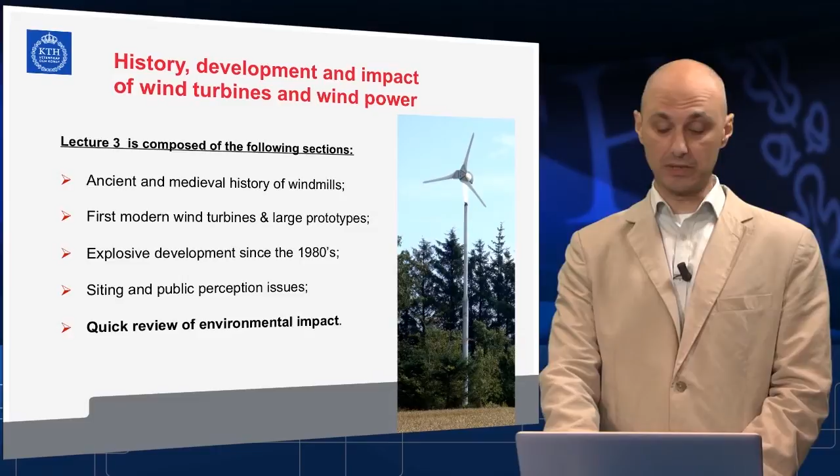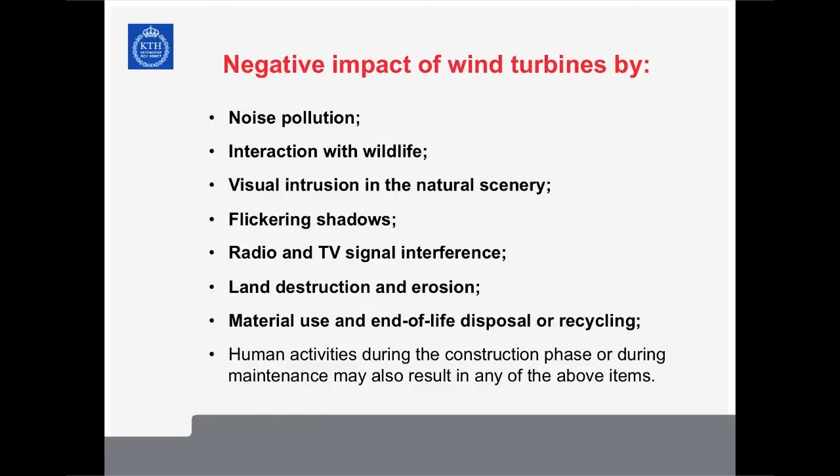What is the impact of wind turbines? Definitely there is always an impact. First of all, they sit where they are visible to everybody, because they should be sitting in the open wind. There is noise. There is interaction with all kinds of life around, both wildlife and human-made life. There is visual intrusion, yes. There are flickering shadows, not always, but sometimes this can be very irritating. Some kind of interference with radio communication systems also.

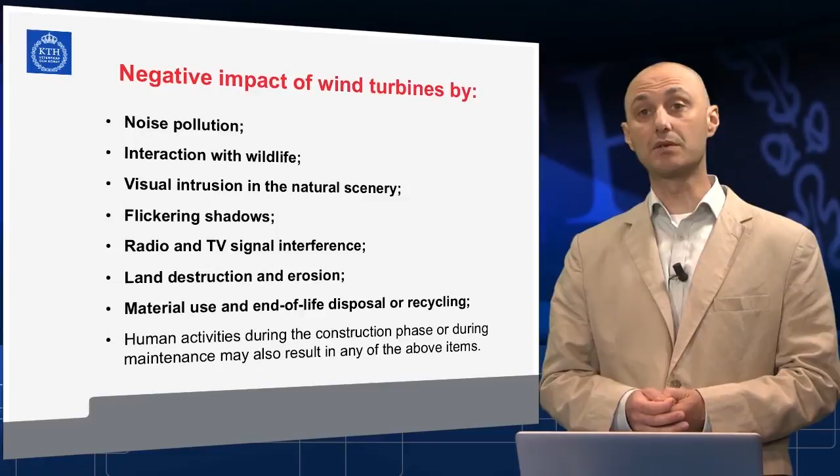And to all these direct effects, we can also add indirect impact through land destruction, erosion, human activities related to wind farm construction, maintenance, and so on. Material involved in wind turbine construction. These can actually be serious issues and will grow in importance more and more in the future. Let's look quickly at all of these major topics.

Noise, definitely underestimated. Wind turbines are noisy, as any machine is, and we can divide the noise into two major sources. Mechanical, from the machinery inside the turbine, and aerodynamic, from the blades, or the interaction between blades and the wind flow, the fluid. The mechanical noise is the typical whining noise of any kind of machine, like gearboxes, cogwheels, generators, shafts, etc., inside. Also, other small devices emit noise, sometimes cooling fans in the electronic devices, any kind of other auxiliary machinery that exists inside the turbine.

It is comparatively easy to handle the mechanical noise through improvements in the wind turbine construction, better isolation to keep the noise inside the machine, not to spread out to the environment. It is a bit more difficult to handle the aerodynamic noise. But as we already mentioned, improvements are being made continuously and modern turbines are far quieter than the first prototypes. Wind blades have improved, especially the tip, the end of the blade, which travels fastest through the air. It is the noisiest part of the blade, and it can still be improved a lot.

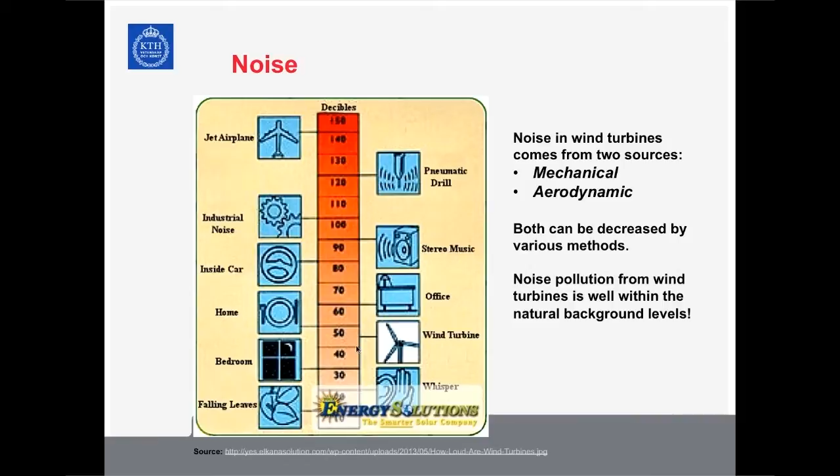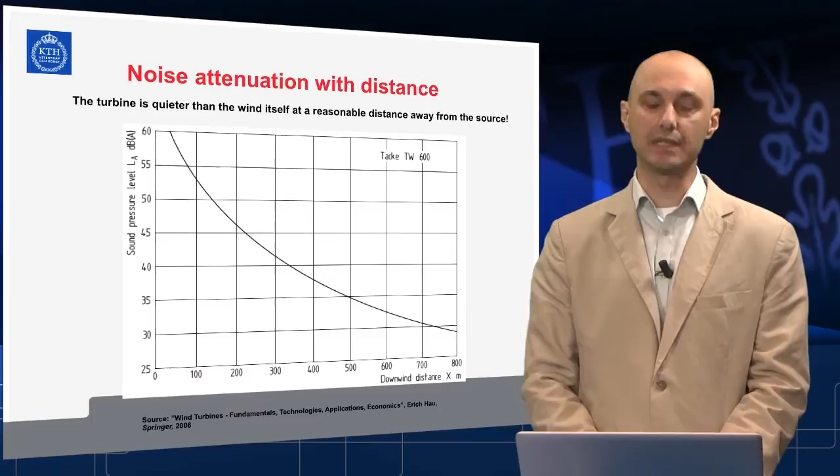Here we come to the threshold of pain, while here, where we still have quite substantial numbers of 30, 40, this indeed is a super quiet environment. And wind turbines are comparatively quiet there if we are reasonably far away from them. Definitely nobody lives immediately under a turbine. Not even an office or a factory would be placed immediately under the turbine. Everybody is always hundreds of meters away from the wind turbine site. So it's actually very difficult to hear the wind turbines. You have to go just under it and listen very carefully.

Another major issue is killing birds. And you may see it in text in this form, avian mortality.

I don't know if you understand this, it doesn't matter. The point is that wind turbines do kill birds. All kinds of machines and man-made structures, even natural structures, very often actually cause death of birds or any other flying animals.

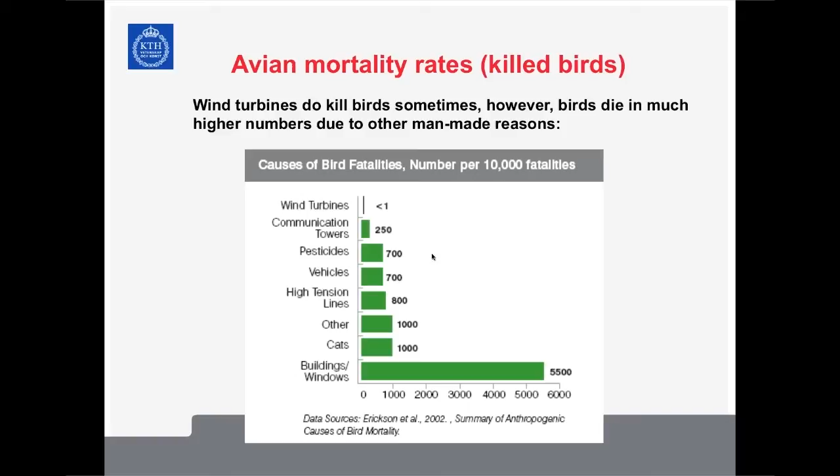But if we carefully measure the specific numbers, we would see that wind turbines up to now are definitely not the major cause of bird mortality. The main causes of birds being killed are buildings and windows. I have seen birds smashing into a window. And, well, birds do not see glass. They would see the building, they would see a frame, but they wouldn't see the glass. And very often they make mistakes in this way.

I have seen birds hitting a car, or vice versa. I myself have been hitting birds with my car. I have seen birds dying from many, many other causes. Well, of course, I haven't been living just beside a wind turbine. Otherwise, I would have seen also birds being killed by the wind turbine.

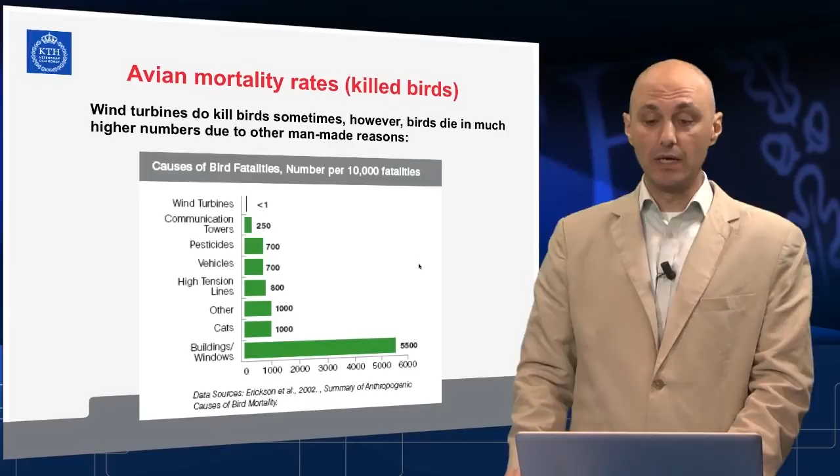But the main point is that any kind of wildlife, they aren't stupid. They aren't suicide prone, at least not always. They learn. And birds would very, very quickly adapt to a wind turbine existing somewhere or being built somewhere. I did find a very nice proof of that, and you can probably find even better sources out there in the literature.

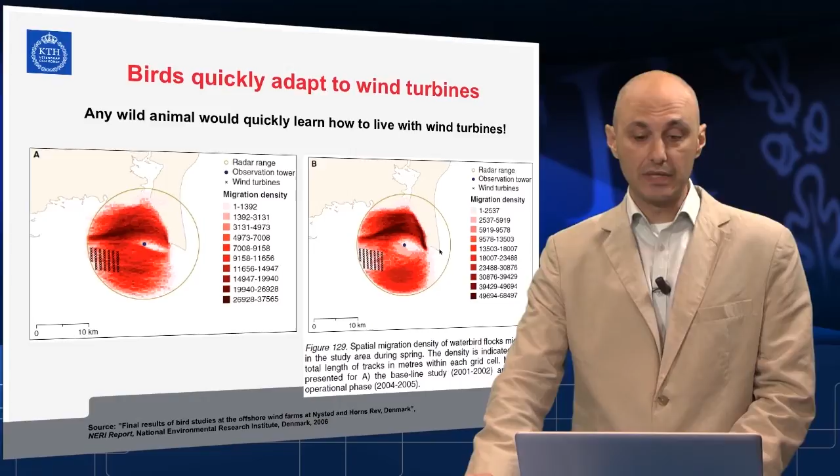They definitely see them. Even if they make mistakes, as in a traveling car, birds very often cannot calculate the speed. And so if it's a wind turbine just sitting there and rotating with the same rotational speed all the time, birds will learn how to calculate it and how to avoid it. You see the migrating patterns for the major bird flocks in the area. They still pass here, and they avoid as much as possible the wind turbines.

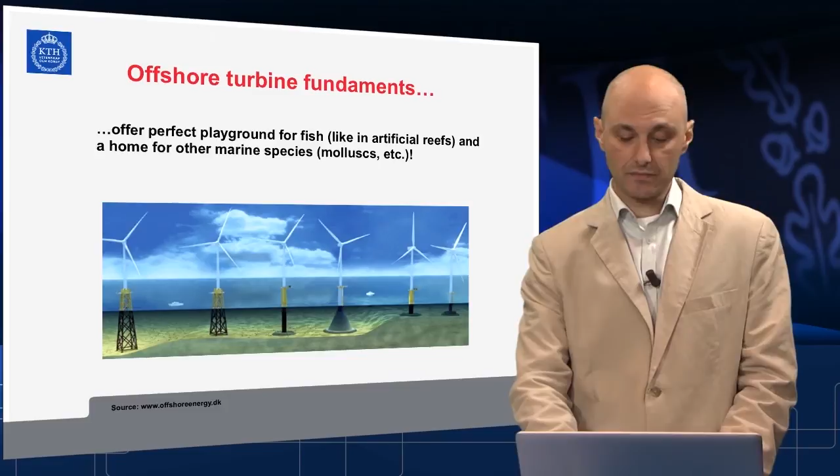Wind turbines, and especially the foundations of turbines underwater, are also deemed to be detrimental to the local environment. Actually, it's quite the opposite. Especially in bottoms like the Baltic Sea and the North Sea, very, very shallow, sandy bottoms, any kind of a solid structure is a perfect playground for fish and a home for other animals as a reef. And this has been proven in various studies.

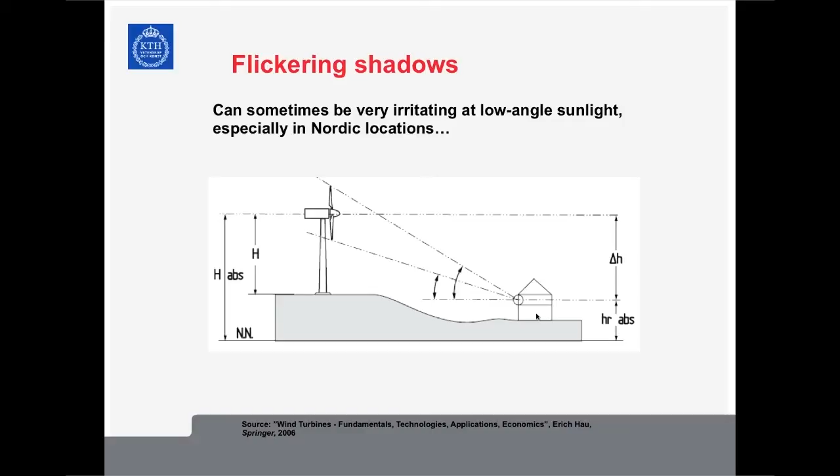The flickering shadow may not always be a problem, and sometimes you don't always see it, but if the sun is very low above the ground, and if the turbine is sitting in a place where the shadow reaches a residential house, for example, somebody living there sitting in the kitchen drinking coffee and just seeing the shadow passing by all the time, not only one shadow, but you probably have 3 blades in here, and you probably have also other turbines on top of the hill. It can be pretty irritating.

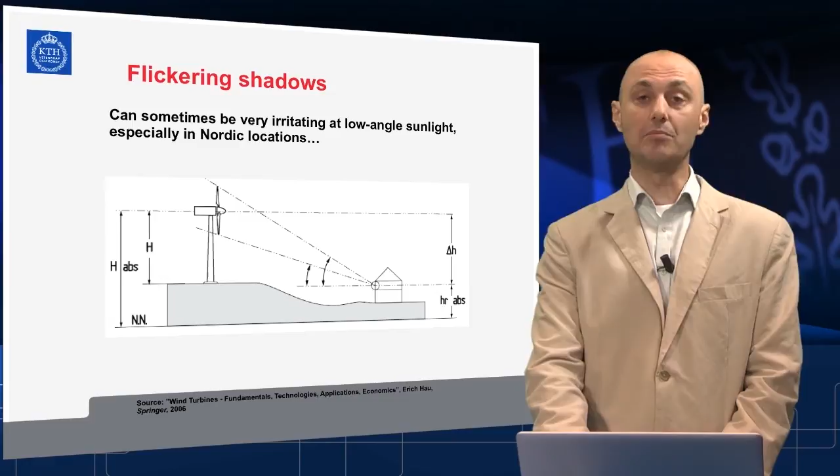The flickering shadows definitely are very local effects and not important everywhere and all the time, but they can be pretty irritating in certain locations, and people have been complaining about those. Another negative impact regarding communication signals is the interference with radio signals. As soon as we have a metal structure with rotating blades sitting out there in the open, it might cause, first of all, a shadow of a signal or a reflected signal.

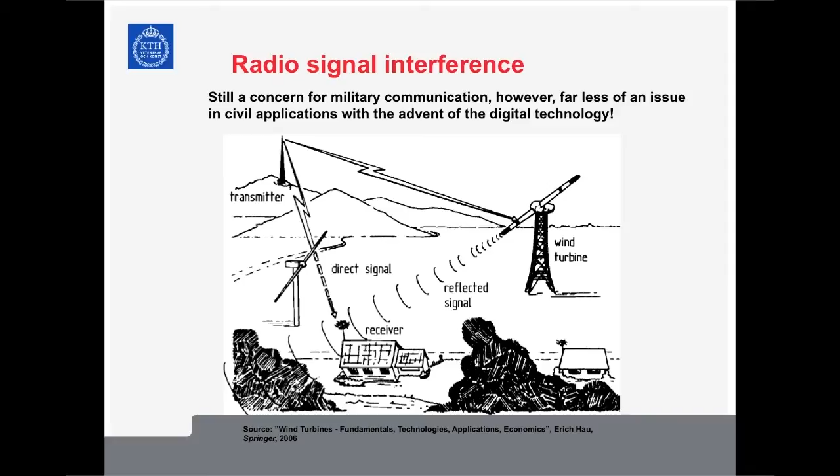It results on your old TV in a snowflake or snow, typical only for analog signals, which are still being used by military communication. And the army guys are quite unhappy still with wind turbine developments, especially with offshore wind farms and so on. However, these days, we switch more and more towards digital signals. And with the digital signals, you don't see any snowflakes.

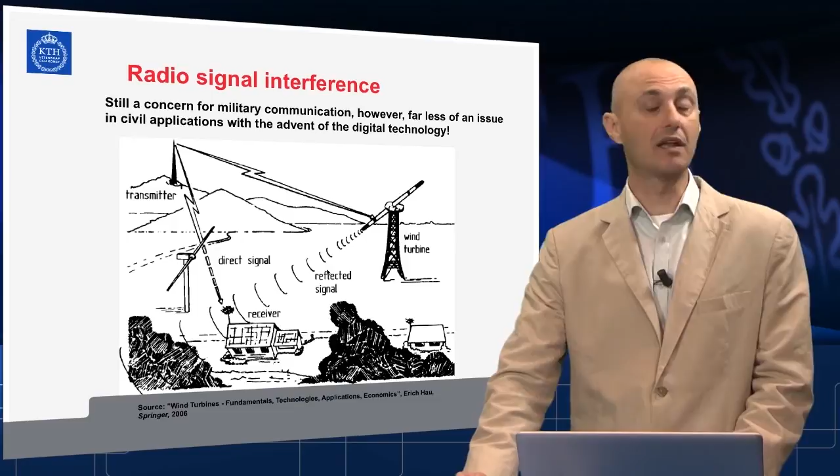You either get it fully or you don't get it. So any kind of shadow might still be important in certain places, but no reflected signals are relevant anymore. And the problem is more or less solved. Land erosion can be caused by wind turbines, definitely not in a direct way, but indirectly through the human activity for constructing the wind farm, maybe also during the maintenance procedures and so on.

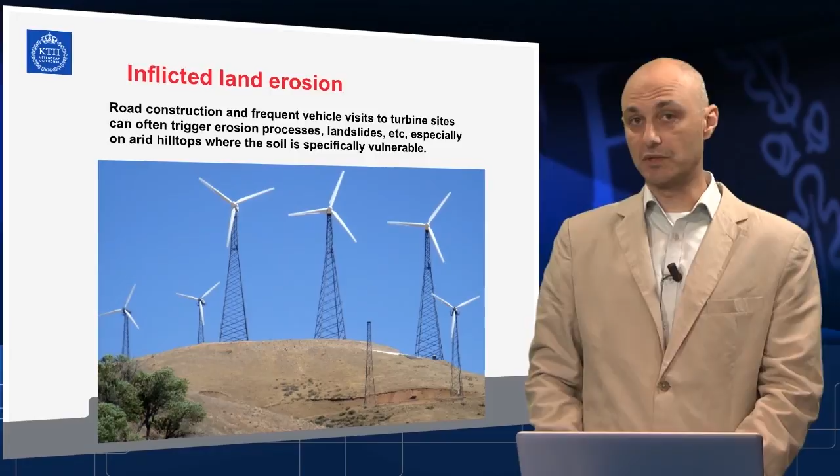And once the erosion starts in such environments, it's more or less impossible to stop it. You're losing land with a very, very fast rate. Another issue which will grow in importance with the continued expansion of wind power is, well, the end-of-life issues, recycling or disposal of all kinds of components. It might seem easy for the metallic structures. Steel is easy to recycle and has a value.

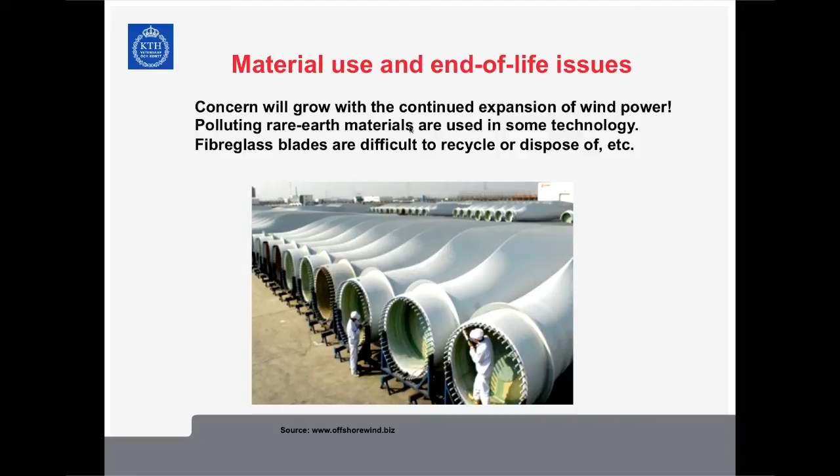But many components, for example, magnets in the electrical generators and so on, many components in modern machinery, not the least batteries, contain rare earth expensive materials whose production is very polluting. So the life cycle analysis for producing a wind turbine becomes more important these days with the further improvements of technology. And indeed, the large number of fiberglass blades, and fiberglass is not easy to recycle, would sooner or later pose a problem. What to do with them?

We drove them in a very expensive way once to the site, and what do we do after 20 years? Drive back the 60-meter long wind blade to a recycling point, or what? Would this cost be involved in the cost of the project? We are pretty much approaching the problem that nuclear plants have. It is very costly to tear them apart and to decommission them. This might happen with wind turbines, especially with the large multi-megawatt, many units sitting out there in difficult to reach places and having enormous components.

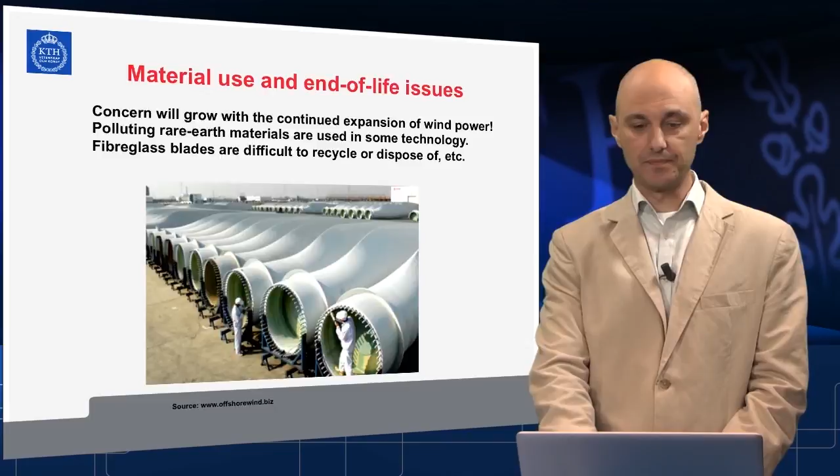We can talk much more about these topics, but let's summarize the most important issues. Wind turbines do have an effect on the environment. Very often it is a negative one. It is, though, often misunderstood or overestimated. Neither noise nor any other similar impact on killing wildlife or destroying the natural habitat of species is true. Or even if it is true, it's not to such a large extent that some people can think.

Both direct and indirect impact through human activities related to wind turbine construction, maintenance, and so on is relevant. However, all of those issues can be softened, can be solved by various methods. There are many more topics to consider, of course. We are forced to stop here. We don't have the time to continue. Including this last section, many other topics can be dealt further with by other teachers and other courses.